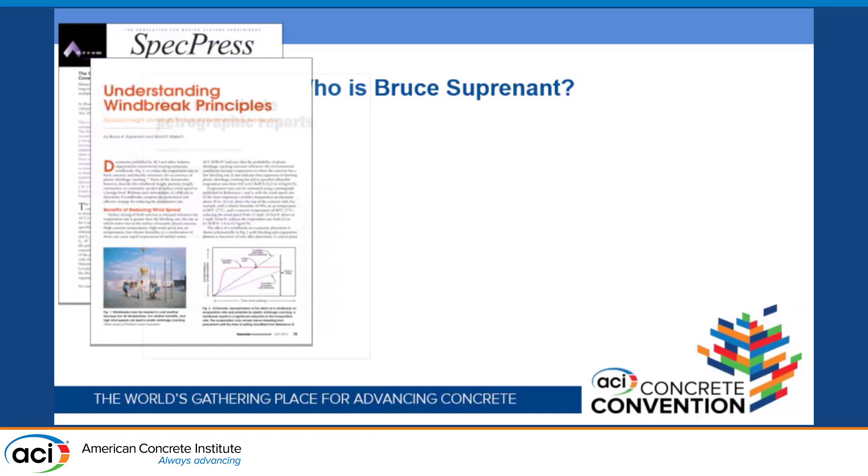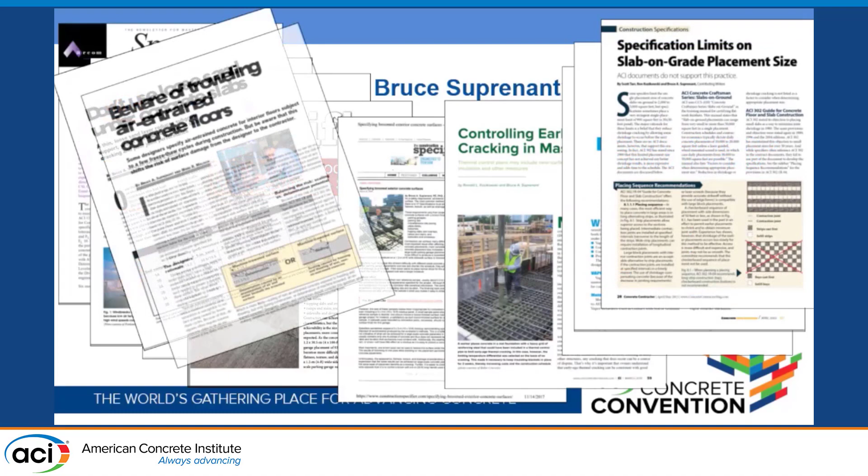We know that he's done a lot. He's written a lot for sure. I've been able to work with him over the years, and probably about 15 years ago, I had a list of all of his publications, and it was a long list, and I could not find it. Something like 15 years ago, he had 150 or 160 publications, just the ones written by him, and I got tired after putting about 30 of them up here on the board.

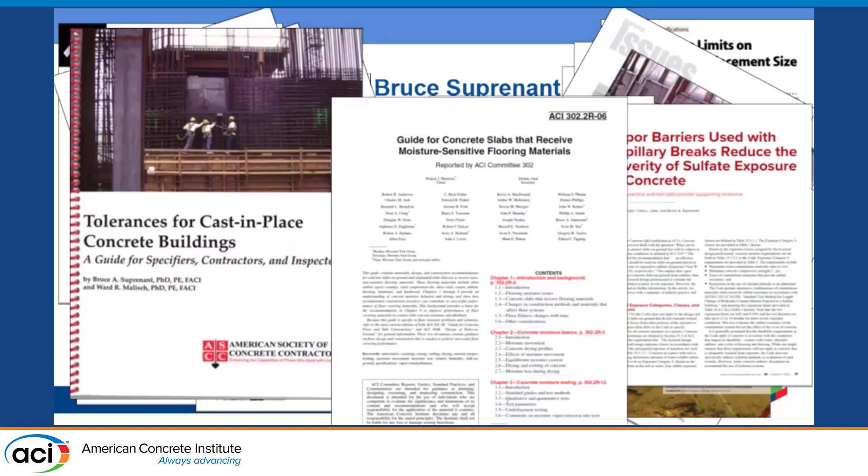I think it's more than that, probably up around 200, north of 200 now. And these are only the ones that his name is on. We know that he's done a lot more. He's done the guide to slabs that receive moisture-sensitive flooring. He was the primary author of that one for 302.2. He wrote that in like 6 months, and it took us 17 years to do the second version of it. But thanks to Peter Craig, that just got published recently.

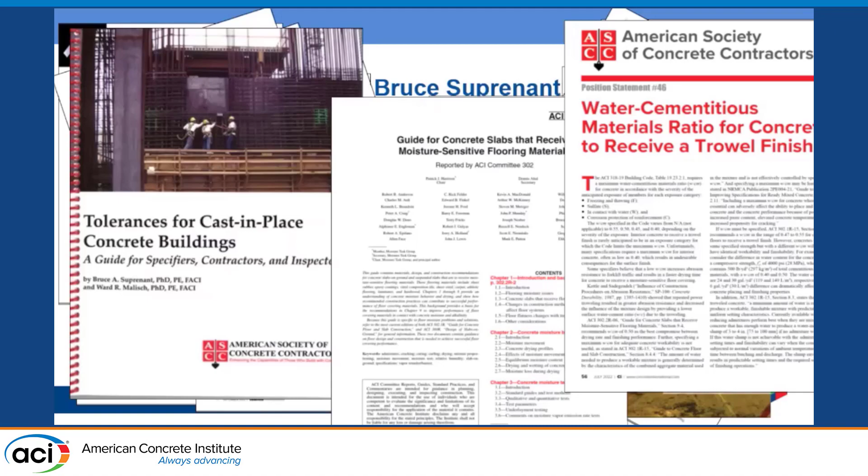And then, of course, we all know that he is the primary author on most, if not all, of the ASCC position statements. So Bruce sees something that's needed in the industry, something that's needed for education, and he goes and does it. One of the things that amazes me is other countries' standards and codes will cite ACI and ASTM, our codes and standards, but they'll also cite Bruce Suprenant. One in particular is the Canadian Standards Association. All throughout this document, just do what Bruce Suprenant says.

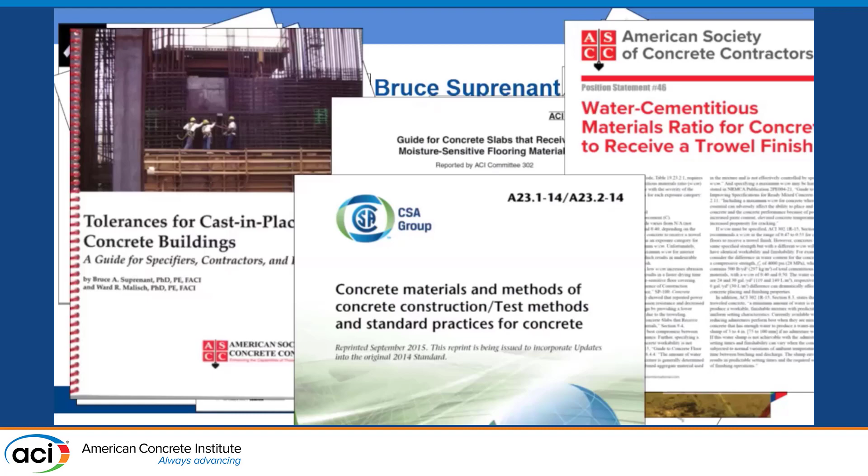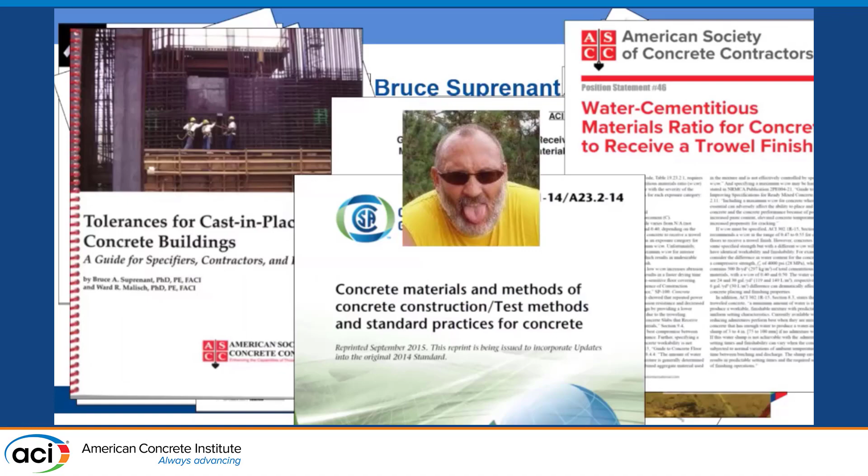He references his three-part curling study. I mean, to me, that's just one thing. We've seen this a couple of times, but that's badass right there. Really, that's amazing. Another country's codes and standards are referencing Bruce Suprenant. That's just incredible.

Damn! I don't even know what a derricator is, let alone a technical derricator. All I know is that's what I aspire to be. I hope someday I can be a derricator too. Webster doesn't know what a derricator is either. I looked it up. So I said, I know Bruce. Just in context, I think I can make up a definition. Derricator. That's a noun. And it means a person who consistently accomplishes what Bruce Suprenant accomplished throughout a career.

It's funny, and I mean it to be funny, but this is the part here. Throughout a career, there will never be another Bruce Suprenant. Nobody is going to consistently accomplish what he has accomplished throughout a career. Nobody can. It's the kiss of death to be called the next Bruce Suprenant. There is no other Bruce Suprenant. So, congratulations, technical derricator. Maybe the rest of us are just regular derricators feeding you all the technical work.

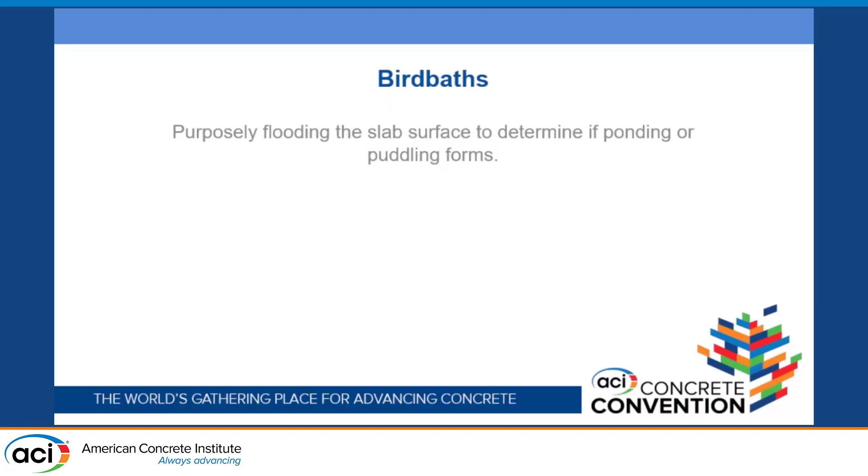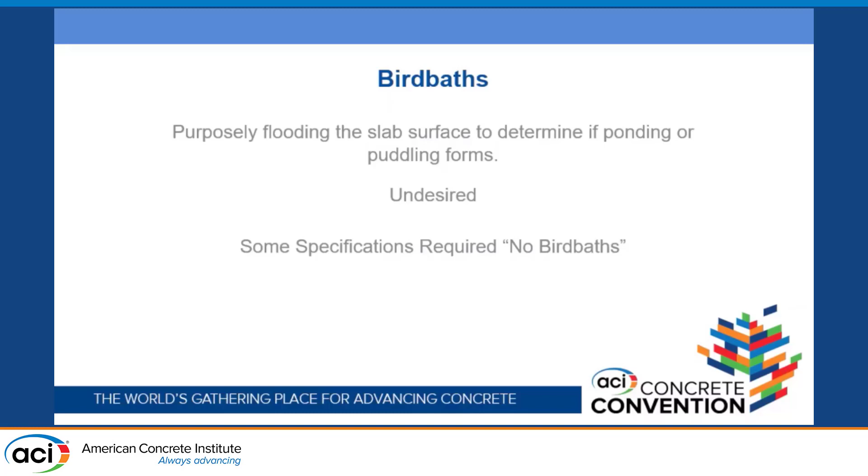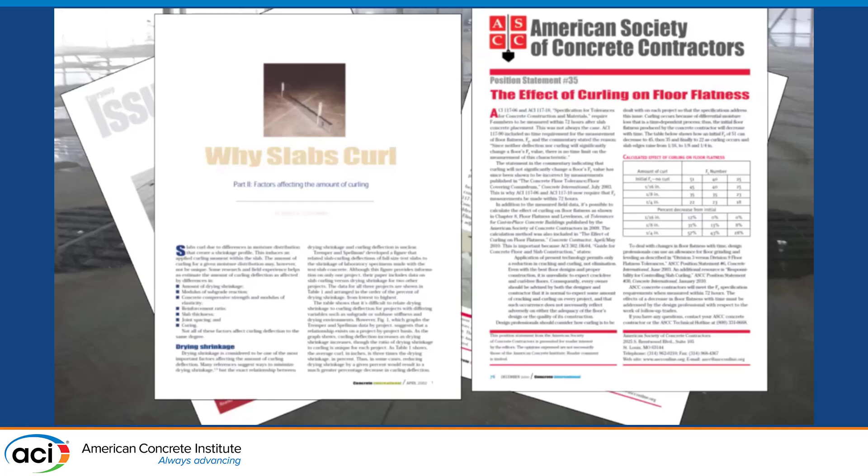So Bruce wrote a couple of articles on that. Bird baths, expectations versus reality. Bird baths on concrete slabs. And this especially, when do you test those? When are you supposed to be looking at bird baths? So we know that concrete dries from the top down. It curls. And even if it's pitched or sloped to a drain or an exterior pavement that has a nice slope on it so it'll drain and shed water, curling is going to override that, and you're going to still get bird baths. To avoid bird baths is impossible. Bruce has taught us that, and I still have to use these two articles quite often to convince people that that's not a very good specification or a very good requirement.

Next thing, of course, I said 302.2, the design of slabs on ground, or slabs to receive moisture-sensitive floor coverings. Bruce wrote an article on that, and he certainly wrote 302.2. Went through all the different things, the vapor retarder, the thickness, the location of the vapor retarder, drying time. There weren't any other publications that really told us how long it took for these slabs to dry, both normal weight and lightweight slabs. Concrete mixtures, what's important in a concrete mixture for concrete that's going to receive a moisture-sensitive floor covering?

Slab thickness. Interestingly enough, there's a rule of thumb that says concrete slabs will dry 1 month for every inch of thickness. Well, Bruce showed that actually it's not true. All slabs dry about the same amount of time. So the rule of thumb is not so good. Concrete finish, of course, we would know for a hard trowel slab, it will slow down the drying rate. Curing has an impact on moisture-sensitive floor finishes. But one of the most important things that I continually use from this article, people will call, I've got a slab that we placed 11 months ago. It's still not testing to the low moisture that's needed to put the floor covering on. I said 11 months ago.

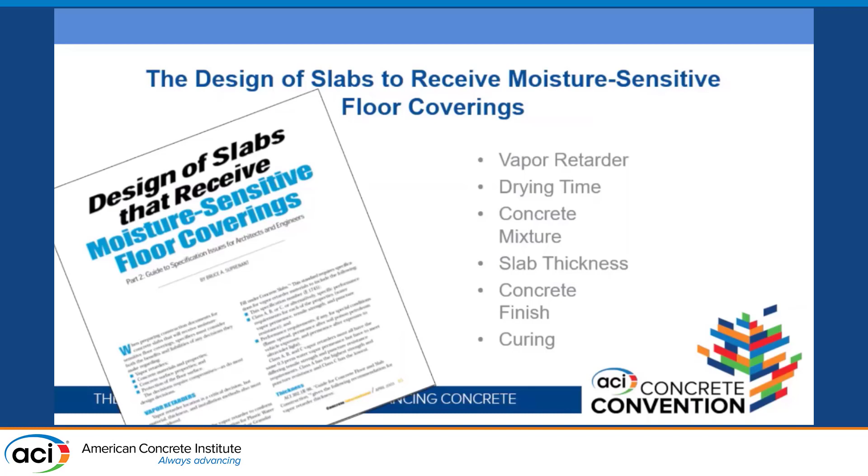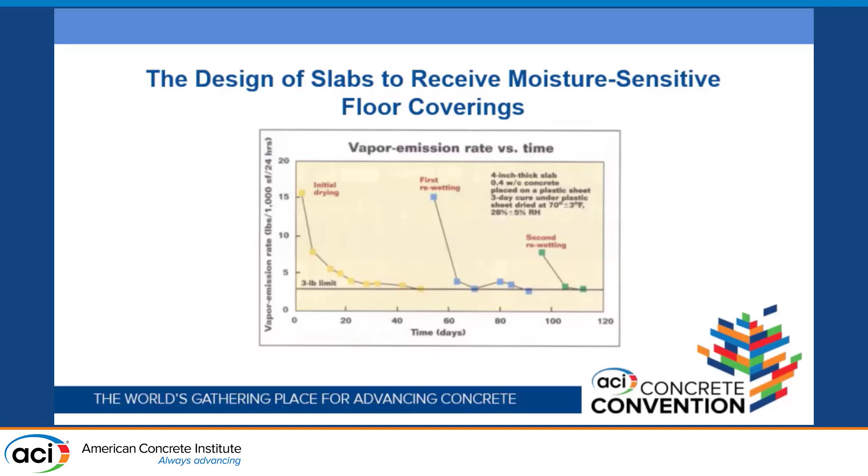That's a long time. When was the roof dried in? Oh, well, last week. If you don't have the roof dried in, you're not in drying conditions yet. And Bruce published that here. You can see the initial drying curve. Then it got re-wetted. Turn the clock right back to 0. Second drying curve. Re-wetted, turn back. You've got to have a good drying environment to get a dry slab or to initiate that slab drying process.

One of the more recent articles that he put out, this is the third and the only one, I'm only going to scrape the very top of the iceberg and then I'm going to get out of here and let the last speaker finish here. So sulfate exposure to concrete slabs exposed to sulfate soils. So Bruce wrote an article, and we probably know that ACI 318 has requirements in there on what we need to do to the concrete for slabs that are exposed to high sulfate soils.

And in general, we lower the water-cement ratio, we put a higher strength, we can use sulfate-resistant cement in there. All of these things, well, sulfate-resistant cement may be in some markets difficult to find. And certainly lowering the water-cement ratio and creating a higher strength may be more difficult to finish, especially when we've got a higher tolerance finish we're trying to hit.

So one of the things that he suggested is maybe another approach is to include a separation layer, or a vapor retarder, that separates the concrete from that high sulfate soil. So hopefully maybe 318 is looking at that. Maybe Kevin's looking at that right now, I don't know. You know, another just a good more recent article.

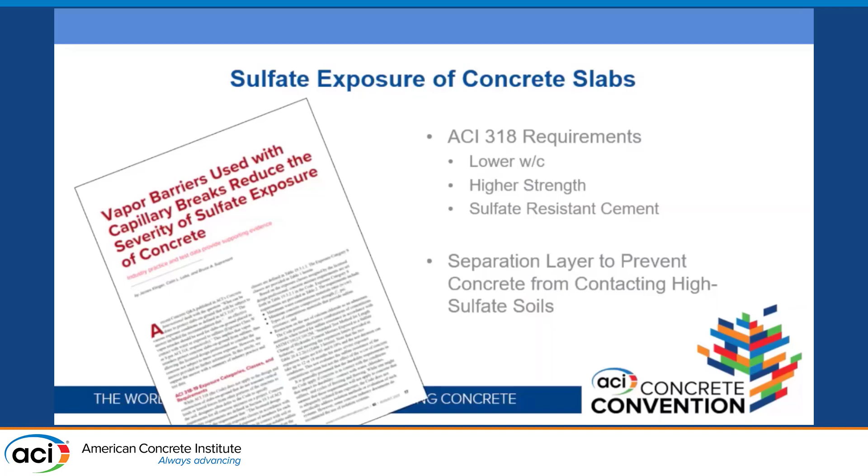So to wrap it up, we know that last week was opening day of baseball. I don't know how many baseball fans are here, but you start watching these opening day games and you look around at these stadiums and there's all these retired numbers. And I'm like, wow, I'm doing that Bruce Suprenant symposium. Maybe I can bring that in. Maybe ACI can retire his number, his member number. Well, ACI doesn't reuse member numbers, so that's kind of lame. Everybody's number is retired when they retire.

So retiring the number for Bruce Suprenant, not a good deal, but then I started thinking, what about the name? Maybe we retire his name. Well, wouldn't that be funny? 25 years from now, some guy named Floyd Suprenant goes to register and they're like, sorry, Floyd, you can register, but you can't use the name Suprenant. That's retired. So that probably won't work.

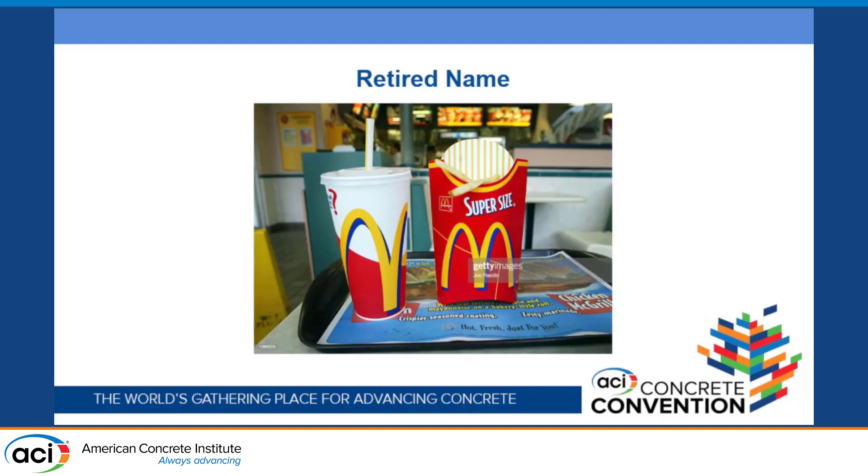Can't really retire your name, but remember when the fast food restaurants created this campaign? Supersize, right? Supersize fries and supersize drink. And it wasn't just an adjective. You go to order something, would you like to supersize that? And it made you feel like you had to, because that was better. You didn't want to go, no, I just want the regular size. Of course I want to supersize it. That's improved. That's better. Yes, supersize it.

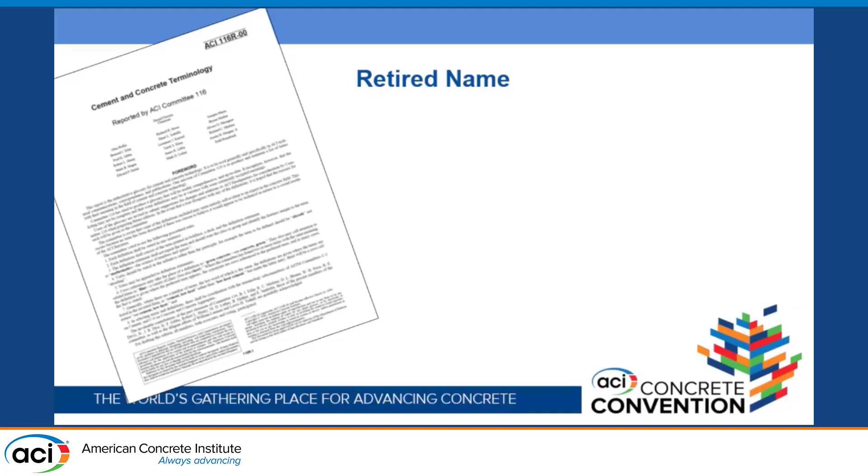So supersizing it gave me an idea. Maybe we can use his name and put it in the cement and concrete terminology. Suprenant, right? What is the definition of suprenant? Well, it's a verb, means to improve the design or construction of concrete. You can just see a design engineer going to a meeting with his design team and saying, I'm just going to spitball it here, but let me try to suprenant that design. Yeah, I got it. Remove some steel, lower the carbon.

Or you go to a contractor and you're like, hey, this is going to bleed a lot. Let me just suprenant your finishing operations, right? Your procedures and your timing. You're a suprenant. Or you're looking at a concrete mix design. It's got a lot of paste content. Let me suprenant this for you. From now on, I make the motion that we move to add the word suprenant to the concrete terminology manual. I think that would be fantastic. Seconded. Seconded. There you go.

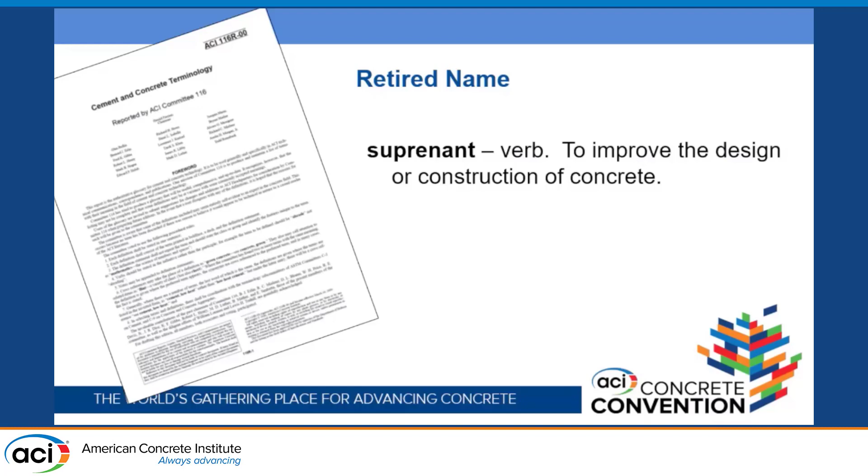All right. So anyway, thank you, Bruce, for all of your contributions to the concrete industry. We've been saying it all day long. You've given us a lot. You've defined that gap. You've provided a lot to the industry. So thank you very much.